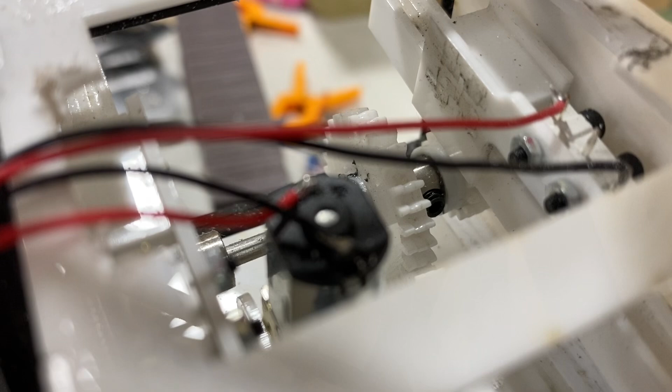Here you can see the drive that I created. It's all done with laser cut acrylic that I designed. I'm basically using sandwiches of acrylic to create the gears, gluing them to shaft collars. They're all 3mm shafts - the motor's a 3mm shaft. I'm gluing them with JB Weld, which is really tough and I think it'll hold up. Nothing of this is tried and true.

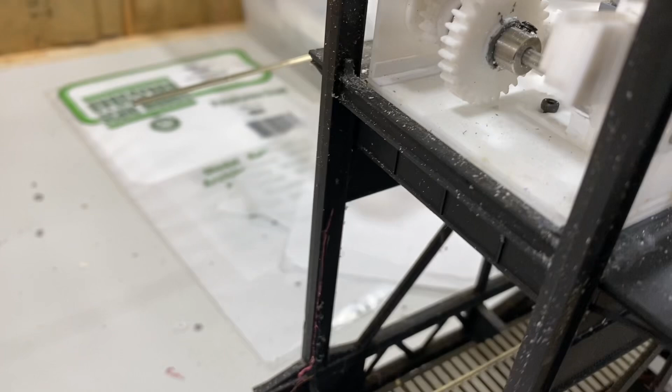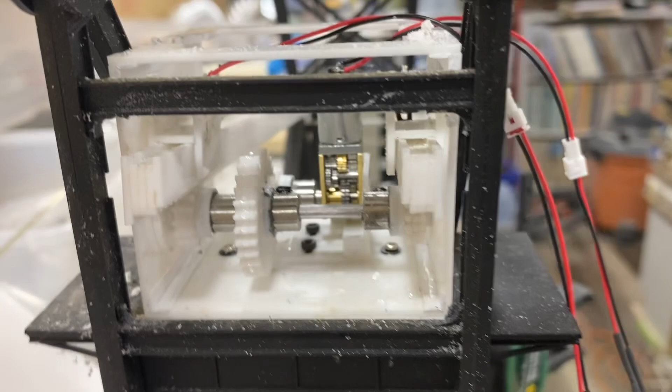Then you can see the arms have to pivot inside the structure. That's why this structure is a little bigger than the Walthers structure, because the arms are inside the structure, so it's a little higher. I've got some ideas of how I'm going to camouflage that with some walkways and things like that.

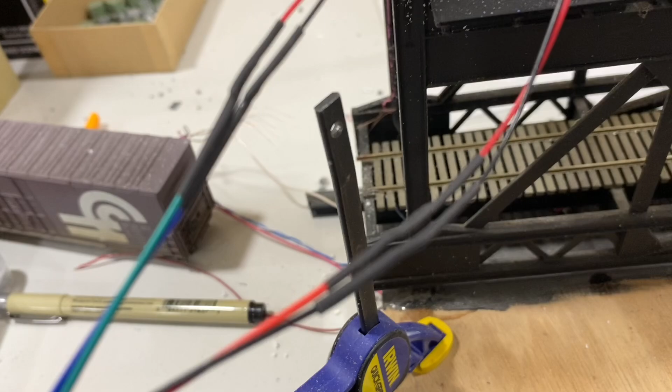You can see the arms are again sandwiches of acrylic that have gears. There's a gear rack that I laser cut on the bottom. There's some plugs there for connecting everything in case I have to disconnect the motor or the other plugs, which go into a limit switch on top of one of those movable guide housings for the arms. Those guide housings tilt as the arms go up, because the geometry of everything changes as the bridge raises - the arms are at different angles, so all the guides have to be designed, and that's what took so long.

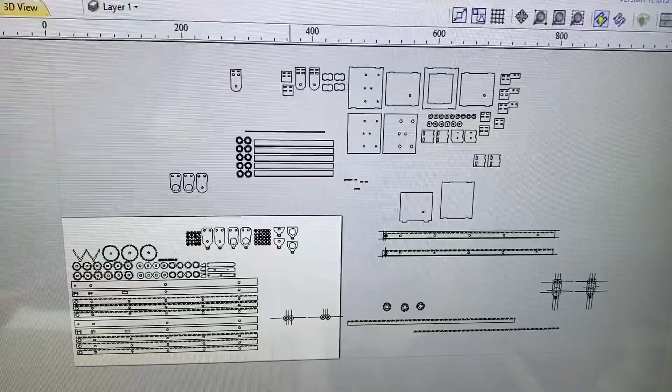You can see there's a tray of some of my failed parts, all kinds of crap that didn't work. The good thing about a laser compared to a 3D printer is the laser is super fast - so when you design something, cut it, try it out on the bench, see if it works, you can then redesign it and recut it quick. With a 3D printer, you're going to be sitting there for an hour or two waiting for a new piece. So you can see a lot of these designs are not being used anymore, but that's kind of where I started.

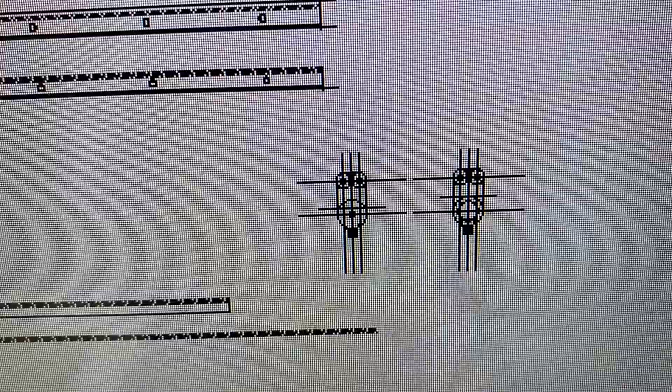I even deleted some stuff in here, so that's kind of how my design process works. I just have the one program and I draw everything on there, because sometimes I've got to go back and pull the old stuff, so I don't delete anything or clean it up - I try to keep it all out there. In the past I've cleaned things up and then deleted them, and it just doesn't work out, because I need it all of a sudden and it's harder to pull back up once you've cleaned up the drawing. So that's why you see a lot of them with all the lines through them and everything.

There's a drawing I have there - I traced the bridge, and I'm actually drawing that now.

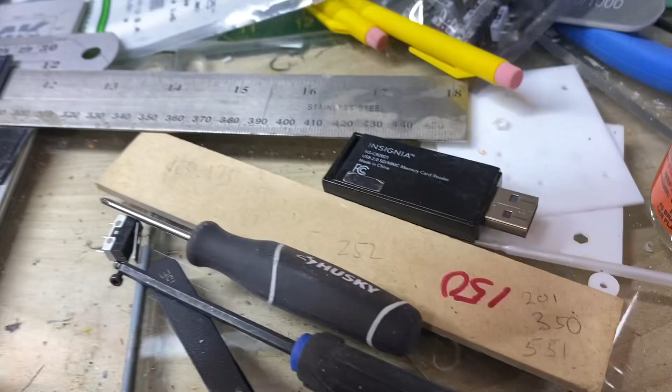But I use metric on everything - my laser cutter understands metric, and my design program, I design everything in metric. And believe it or not, you have more availability of metric parts on Amazon and eBay than you do of standard parts. There's the motor.

So you got an idea of that, at some point I'll probably get into the actual how, the mechanism. I mean, it's pretty simple.

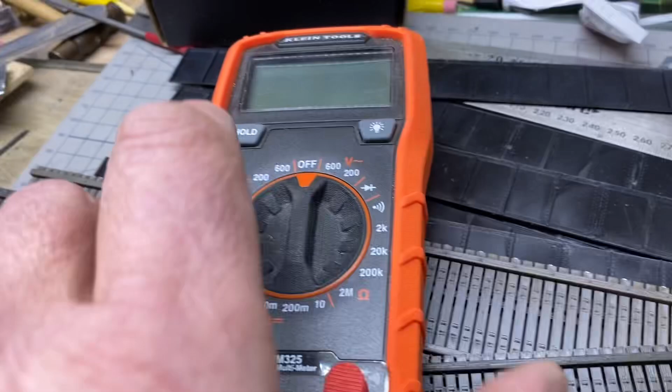It's just some gears and it turns a gear rack, just like the Walthers kit, but the gear rack's a little bigger. The teeth are a little bigger, so there's fewer teeth, which is one of the things I wanted to do to make it more reliable. Fewer teeth and fewer turns of the motor means less wear and tear, and that was my concern. A tiny Walthers Delrin gear would just grind down one day if something got stuck, and it would be impossible to fix. So I wanted all these parts to unbolt, so I could just unscrew everything and put in a new part.

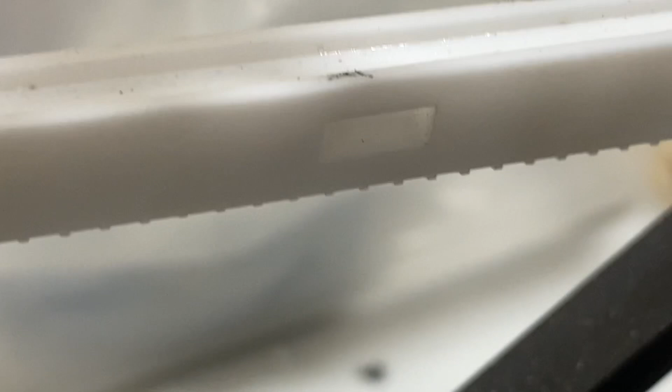That slot was part of the original design. I was going to put a nub on that to trigger the limit switches, but you can see those limit switches up there now. They're actually on the top, so I'll have to just glue a piece of plastic along the top. So now we're getting back to the beginning here.

This was like the first set of gear rack that I designed, and gears, and those gears with the big internal sections were too fragile to glue up. They kept splitting on me. The gear rack itself is very close to the Walthers gear ratio, which was what I was trying to get away from, but that's how I ended up starting out, pretty close.

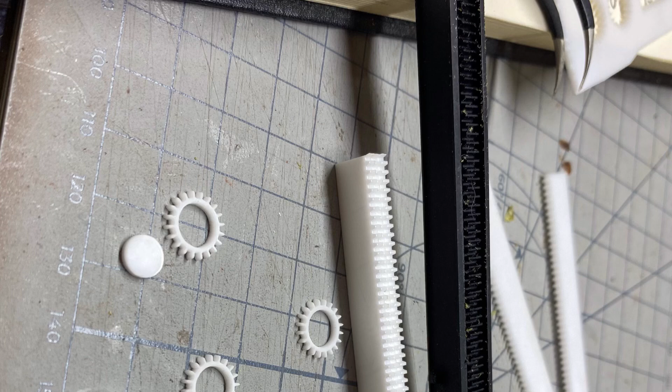You can see the two of them side by side. The black is the OG Walthers one, and you can see my rack on the bottom. In reality, the rack faces down, so you're not going to really see it. I don't know how close the Walthers is to prototype. Mine's probably a little bigger than prototype, but the real one might be somewhere between both of ours. I'm not sure about the Walthers, but the bridges I've seen seem a little coarser than what's going on with the Walthers bridge gearing.

So I did increase the size of that, and I also wanted to reduce the number of rotations of the motor, so I could control it and nothing would be under a lot of stress. Just a nice slow movement of everything, all the gears meshing, nothing heating up.

So this was, I think, the redesigned gear rack, and here you can see me, I glued one of the gears up, and I'm manually fussing around to see, hey, this will actually work. This is not going to be beyond what I'm capable of doing. And that was like a month and a half ago.

From that point, some of the little mechanical stuff associated with this and the geometry issues really came out. At that point I said, well, the Walthers guys, the engineers that designed that model, the product design guys, or girls, I'm not sure, knew what they were doing. But they designed it around a cheap motor and cheap gears, just for cost obviously.

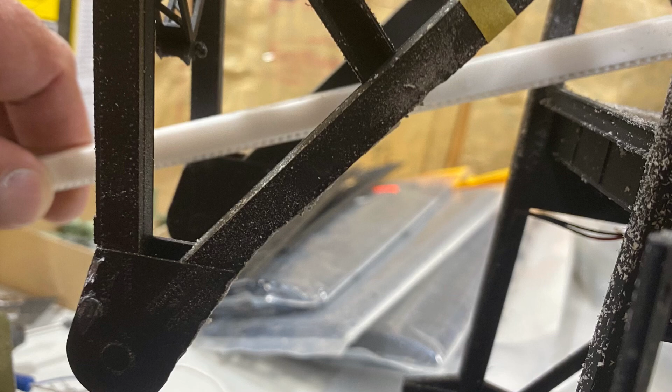So there you can kind of see this is the rack I ended up using. You can see the coarseness of it. I think I have about 100 and something teeth for the whole length of it.

And I think my gears are maybe like 16 to 20 teeth on the small gears. So again, it only has to spin like 5 or 6 times to travel, to extend the gear rack the length I need to operate the bridge, so it's fully open.

Everything is sandwiched, so the rack is I think 5 pieces of acrylic, 16th inch acrylic, 060, which is 1.5 millimeters, glued together. And then the gears are sandwiches too, I forget how many pieces, but everything's a sandwich.

So to make it easier to join the sandwich together and make sure everything stays in alignment, since I'm dealing with gears here, you can see these holes I just designed into the racks. I just put a bunch of random holes, maybe like 1/8 inch or 1/16 of an inch, so I can slide in a styrene rod to align the whole thing as I'm gluing it up.

Styrene bonds to acrylic awesome, like real fast. Acrylic bonds to acrylic too. If I use Plastruct, the orange Plastruct cement, it has to sit for a little while and I have to clamp it sometimes. It's slower, but more controlled. I do have acrylic cement, which is super fast, actually too fast. So I usually use the orange Plastruct cement to glue up the acrylic.

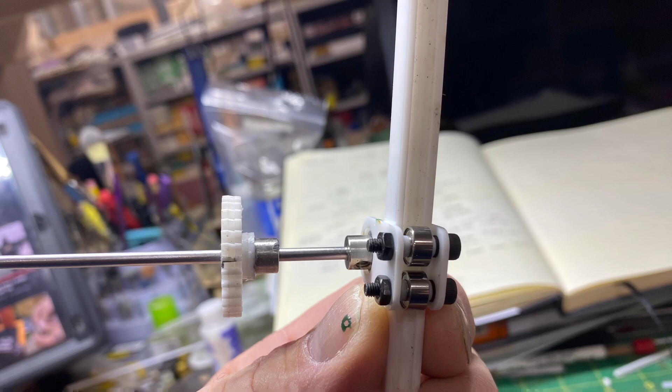Not that I used to use dope, not dope drugs, but nitrocellulose dope to seal Pinewood Derby cars when I was a kid. So I've been inhaling solvent glues and paints my whole life, so it's kind of beyond worrying about it at this point.

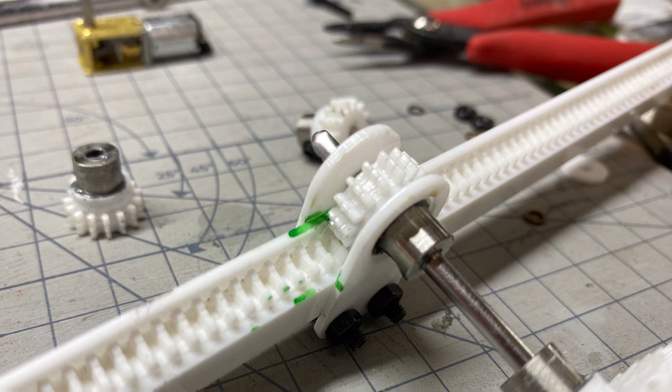But it's still, don't want to breathe it if I don't have to. So there's one of the first roller designs, because you can't have a fixed gear in the motor housing in a fixed position, because as the bridge goes up, the angle that gear rack is at is constantly changing. So the gear housing that drives that thing has to move with the rack. This was one of my first designs. It uses some ball bearings, spacers and bolts. Believe it or not, this did not work as well as I thought it would.

It kind of bound up a little bit, got sticky and fussy. On the bench it worked great, but when I put it on the bridge it didn't do so good. You can see the gears kind of contained there. Just too many things, like it could wedge for some reason. I don't know if it needed to be looser, or the whole thing just needed to be loosey goosey for it to work right. I tried about 3 or 4 different iterations of this to get it right.

In the back left there you can see how I build the gears. It's like 3 pieces of acrylic sandwiched together for the teeth, then another round piece, and then kind of a washer, and then I put the shaft collar in it. That shaft collar has a little Allen screw, and that's how I secure it tightly to the motor shaft.

So this is I think what I actually settled on, which doesn't use any ball bearing guides, just plastic. This did get modified one more time because I decided I could put the limit switches on these things, so the limit switches move with the rack, which would be great, so they're always in alignment. I added a little wing that came out of this that the limit switch bolts to, and it seems like it's working great. I have a backup limit switch too, because I put one on each arm.

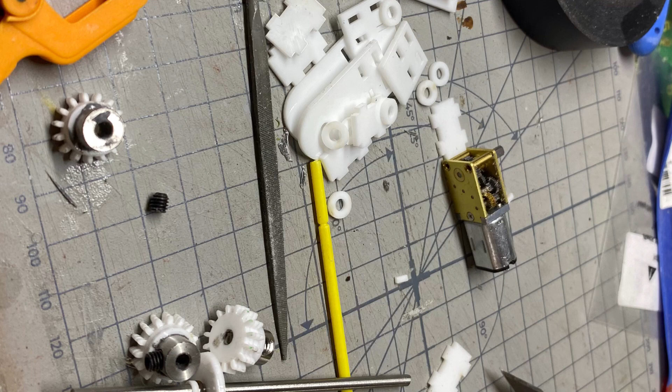There you can kind of see the guides fitting together, the gears. This is kind of everything. There is one gear that's bigger - the gears that drive the racks are the same size, and the gear on the motor is the same size. Then there's a larger gear on the motor shaft that the motor gear hits, and that gives me a ratio that slows everything down.

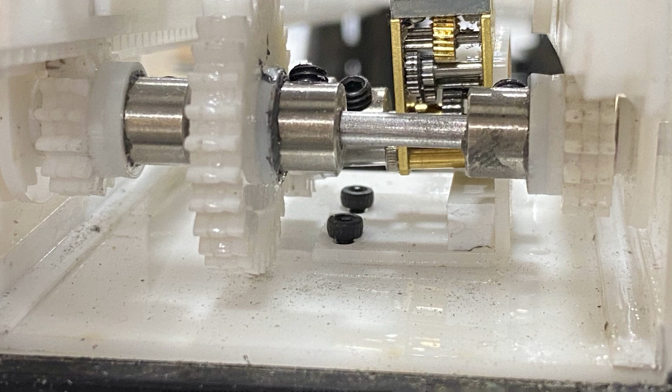So it gets me like a 4-to-1 ratio. I go from, I think I was at 20 RPMs on the motor, and I go down to like 5 RPMs now. I've got 20 teeth on the gear, or a little less than that. But that'll give me the full run of the rack in 1 minute, which is about appropriate looking for the bridge going up - you saw the video at the beginning.

It looks pretty good. So taking pictures of your work is really important. If you look at this picture, I took a close-up - I didn't even see this. Everything was running fine, everything was great. But if you look at this picture closely, you can see that motor mount - the motor's kind of canted, it's actually bending because of the torque and everything.

The motor is bending, so that's one of those things where you go back and redesign it. I went back and all I did was add a little flat part to the front, like a support, a gusset, to keep the motor mount stable - the motor stable and at 90 degrees to the shaft. But if you didn't take that close-up picture, you would never see that. So it's always really good to take close-up pictures of your work with a phone, it's no big deal, and then zoom in - you'll see every imperfection that you're missing with your eye, and you can fix everything.